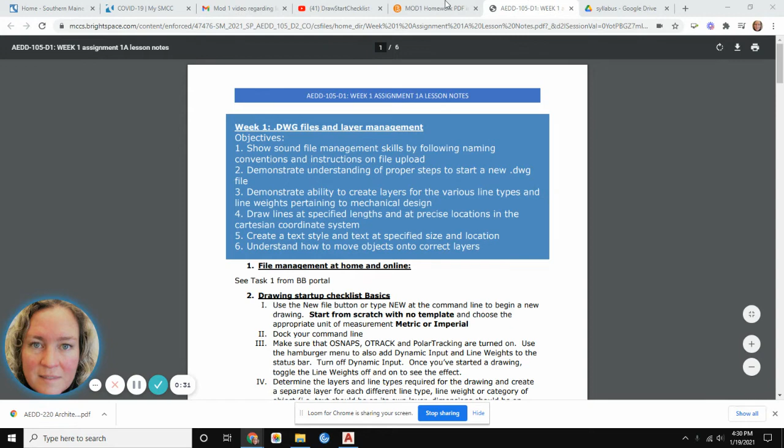This is the instructions and lesson notes for assignment 1, which covers the lines drawing, where you're going to be creating this drawing and creating these layers. So what I failed to upload was the video on how to create those layers. But also included in these notes is a drawings checklist.

This is what I want to start with right here. When you're starting a new drawing at home, you want to ask yourself what kind of drawing it is, and then check for these things. It would be a really good idea to print this checklist out and have it available. As you continue through the semester, this checklist will kind of just become automatic for you, but for now you want it nearby so you can keep track of it.

The first thing we're going to take a look at from the drawing is whether or not it is a decimal inch drawing or a metric drawing. One giveaway is the size of the dimensions. 10 millimeters would be something not much bigger than the length of this line, maybe even smaller, maybe half the length. The fact that this line is much longer than that is an indication that it's 10 inches, which makes more sense.

So these dimensions being shown here are decimal inch values, meaning we're using imperial units. What you're going to do is write inside the brackets the metric units that convert from those imperial units. The conversion is 25.4 — there are exactly 25.4 millimeters in a single inch. So if I take 10 inches and multiply by 25.4, the answer inside the brackets would be 254 millimeters.

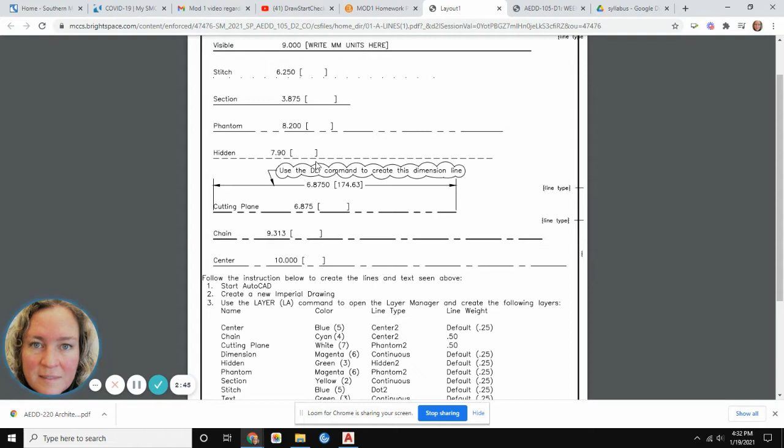All you have to do is take the number that's been given here — that's the number you use to draw the length of the line — and multiply it by 25.4. Put your answer to 2 decimal places inside these brackets, just as shown here. That's the first step we need to understand, and there's your conversion right there in your worksheet as a reference.

So the first step is to ask yourself, is this an imperial or a metric drawing? Then we're going to start a drawing file knowing that information. If you were successful in loading AutoCAD on your home computer or using the virtual desktop, open AutoCAD by double-clicking on the symbol on your desktop. On mine it's over here, but on yours, if it's the virtual desktop, it'll be somewhere over here. Just double-click on that, and it will open up the CAD program.

This is what CAD looks like when no drawings are open. To start a new drawing, click on the arrow here, and go to No Template, Imperial or Metric. We just figured out that this drawing should be drawn in imperial units, so we're going to choose the imperial choice here, and that's going to start a brand new drawing file.

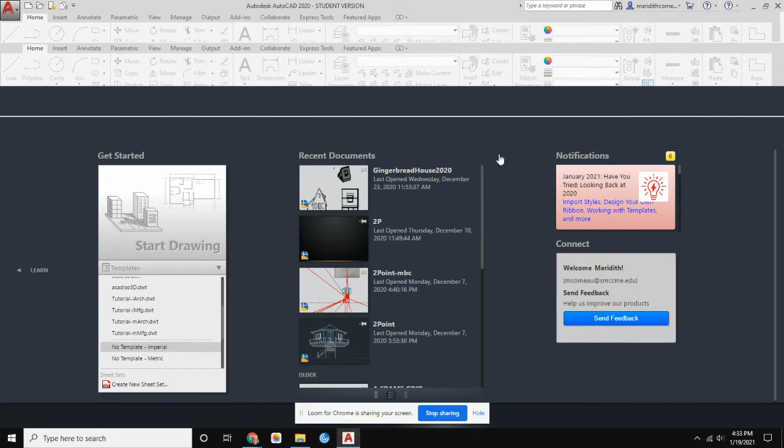It's just taking a second to do that. The next step in our checklist is to dock your command line. To understand what that means, let me show you around AutoCAD a little bit. When you're looking at AutoCAD as it's opening, the major areas to pay attention to are your command line, up here where my cursor is, and your place to type a new command. You always want to make sure that when you're ready to begin typing a command, or following along with me on a video, this says 'command:' and you're ready to start a new command.

As you start typing a command, like line, which I'll use as an example because I want to create a new line, a list of common aliases for the different types of commands will come up, and you'll see the command you're looking for appear in the list. Notice that all I had to do was type L and line came up as the first option. Start paying attention to how little of the command you actually have to type for it to come up.

So take a guess, what do you think the command is for circle? If I type C, the first thing that comes up is circle, so I can just click that and go right into the circle command. You'll be learning more commands and learning to pay attention and read that command line.

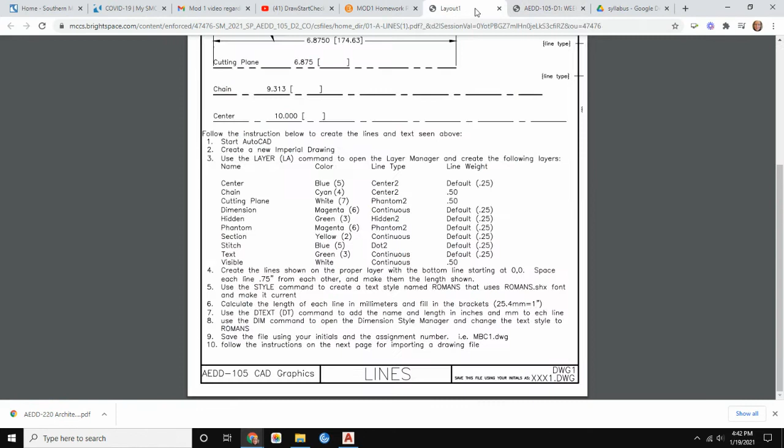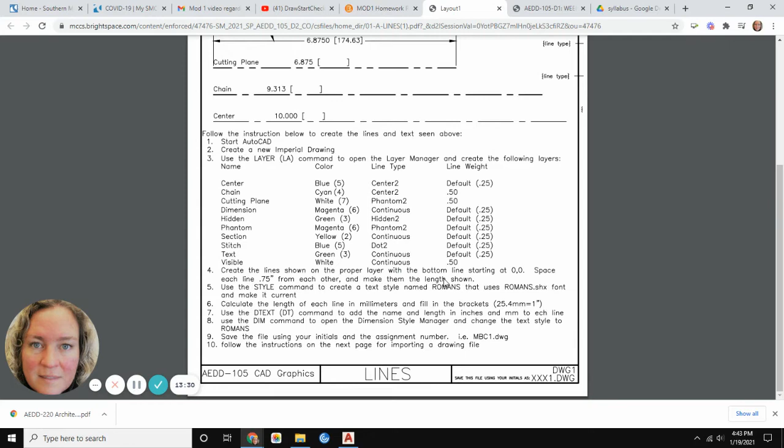Now I'm going to start with a layer called Visible, which is one of the layers you have to create for this next assignment. We'll go reference what it says for the visible layer: it should be the color white, which is color number 7—referenced up here—it should be a continuous line type, and it should be set to a line weight of 0.5.

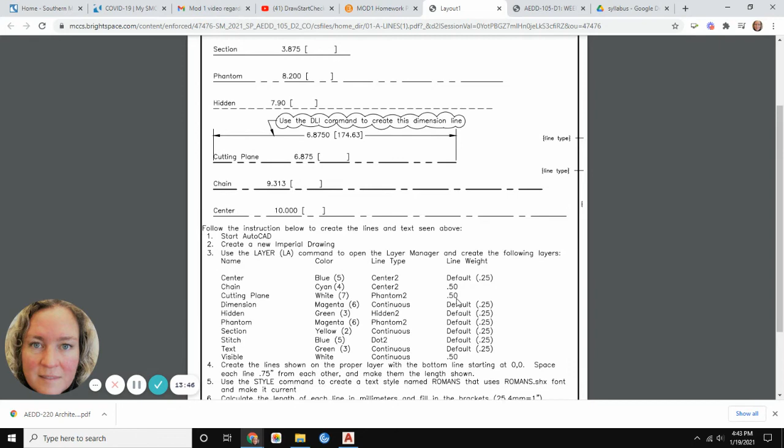Notice up here, these lines have different line weights—you have thick ones and thin ones. We'll be using the default line weight for thin lines of 0.25, and the 0.5 line weight for our thick lines. All you need to do is reference this to see whether a line should be thick or thin, and it also lets you know in the layers whether a layer should be thick or thin.

So let's go back to AutoCAD and set those settings. The color has already been set—the reason is the default color used for layer 0 is also white, so we already have white. If I wanted to change the color, I'd simply click on the color swatch, and a select color dialog box comes up where we can pick a new color.

For the line type, that's set to continuous already, since that's the default line type loaded in the 0 layer in AutoCAD. So how do I change the line type if I want to? You can click on continuous, and then load new line types. There's a load button with an ellipsis that allows you to load new line types into your project.

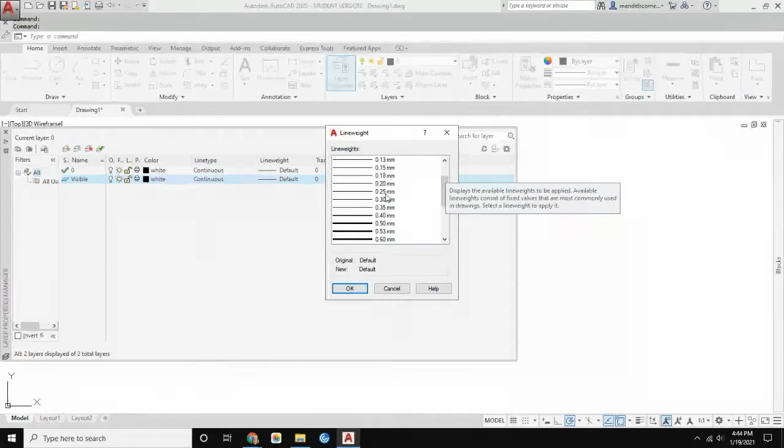The last thing is to set the line weight, and notice it says default. If we click on that, the default line weight should be 0.25 millimeters. We want to change that to 0.5 millimeters for visible lines, and you can see it actually changes the line weight in visual representation on your screen as well.

Just to show you the difference, I'm going to make the visible layer current by double clicking on it. You see how that puts the green checkbox next to it. I'm just going to do a line, so we'll also learn how to do the line command, L for line. As soon as I see the word line come up, I'll hit enter on my keyboard, and then read my command line.

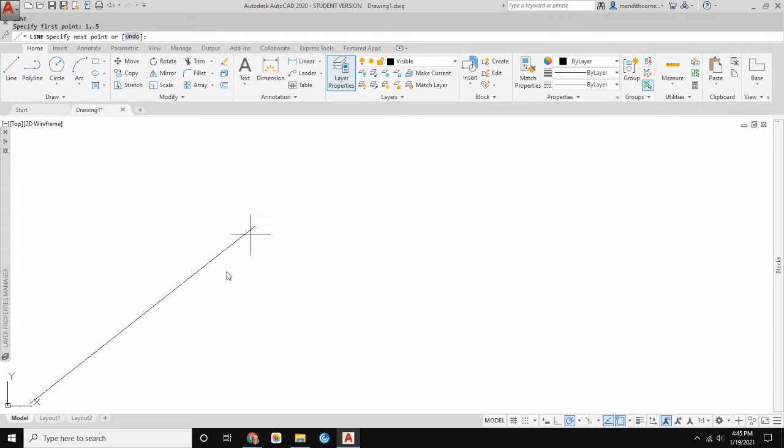It says line, specify first point. I can do a number of things to specify my first point. I could type in a value, which is called an absolute coordinate. Let's say I wanted to start the line 1 unit over in the X direction and 0.5 units up in the Y direction. It's going to start the line exactly 1 inch over from the 0 point where the X and Y axes intersect, and a half inch up in the Y direction, and I have my line started.

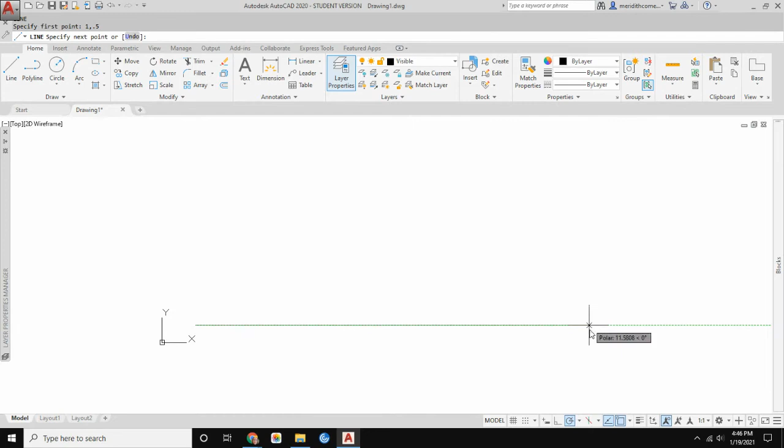It's going to look like an elastic. Notice every once in a while my line turns kind of dashed green and snaps to a nice straight edge. This is polar tracking coming into play—OTracking and OSnaps I'll demonstrate in a second. Polar tracking allows me to see that I'm drawing at exactly the 0 degree angle. If I turn and go up, it snaps exactly at 90 degrees, and it will snap again at exactly 180 and 270.

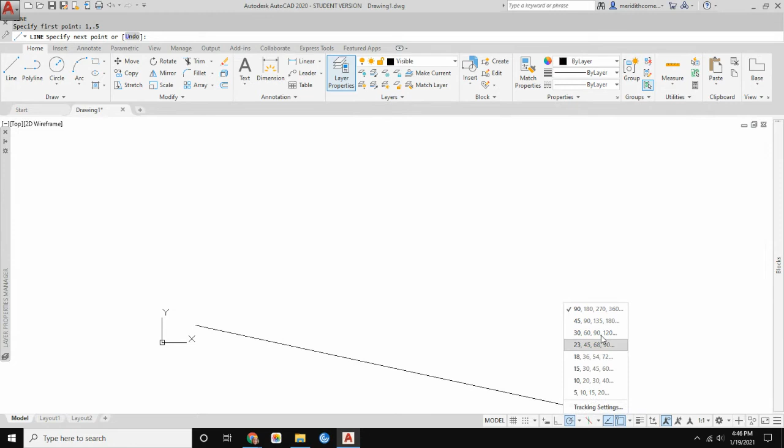If it so happens I've got a drawing with 30 degree angles, I could change to that, and now it'll snap at 30 degree angle increments as well—there's 30, there's 60, 90. That's how polar tracking works. I'll keep that on 90 for now, and then just draw in that line at a random length by picking a new point. If I don't want to use the line command anymore, I hit escape.

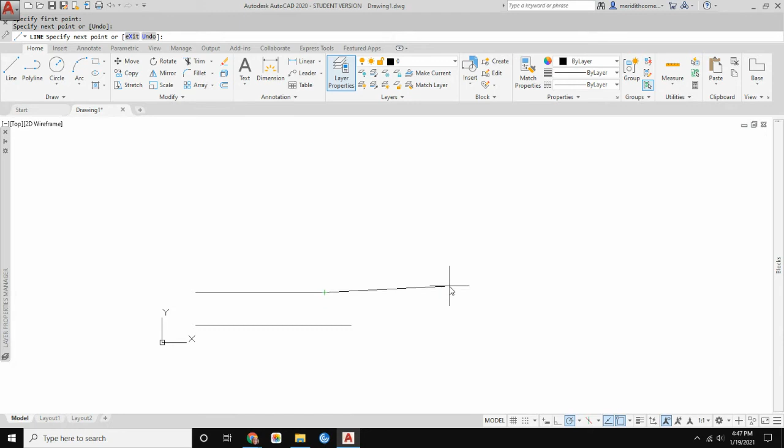Now let's draw a line using the 0 layer. It's also going to be black, and I'll just hit L and enter again and randomly draw the line this time—pick a spot with the left button of my mouse, and then draw the line the same length. Now these lines look like they're the same weight, so why did we change the layer?

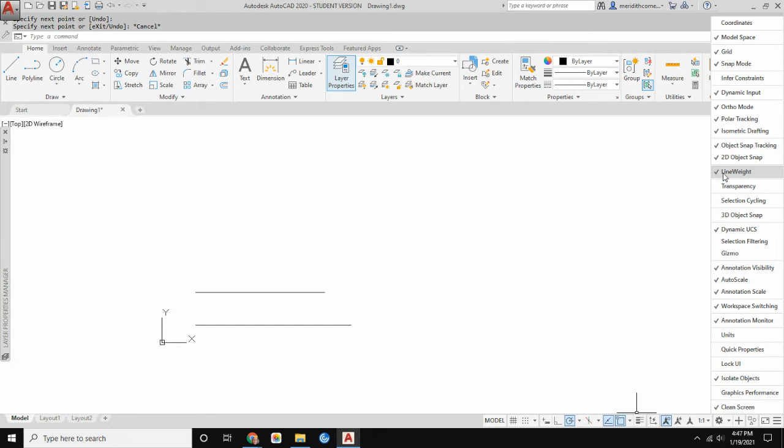One thing you want to make sure is turned on is your line weight display. If you don't see that line weight display in your drawing properties or drawing status, use your hamburger button and look for line weight. If there's no checkbox next to line weight, put one there and that button will appear. Now watch what happens when I click on that line weight button—now we're able to see the differences in line weight, because they're being controlled by the line weights set by layer.

So let's create another layer. This time we're going to create a layer, and I'll use Alt-N to create a new layer, and we'll make this one a hidden layer. I'm just moving around through the example lines you're going to be creating anyway—this one's to show you how to set up one that needs a different color.

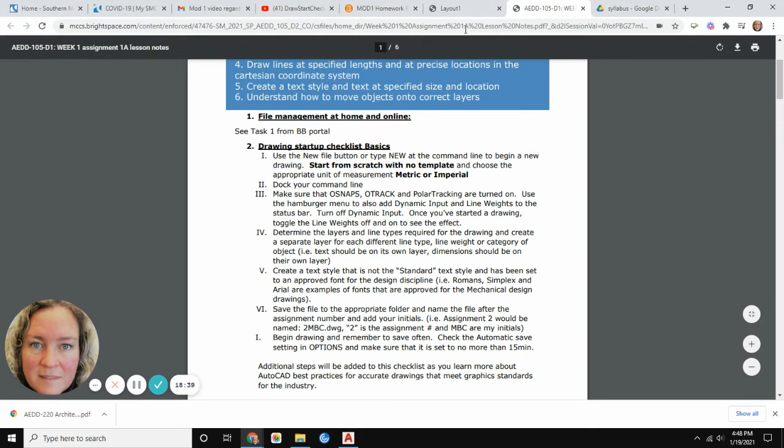Let's see what color hidden is supposed to be—it's supposed to be green, which is color number 3. It's supposed to be a hidden 2 line type, but it's supposed to have a default line weight. So we'll go back to AutoCAD and make those changes. It's color number 3, that's green. Go back into that layer—so we've successfully set that to green.

It's not supposed to be a continuous line; it's supposed to be a line called hidden 2. So let's see if we can find that in the list by loading that line type.

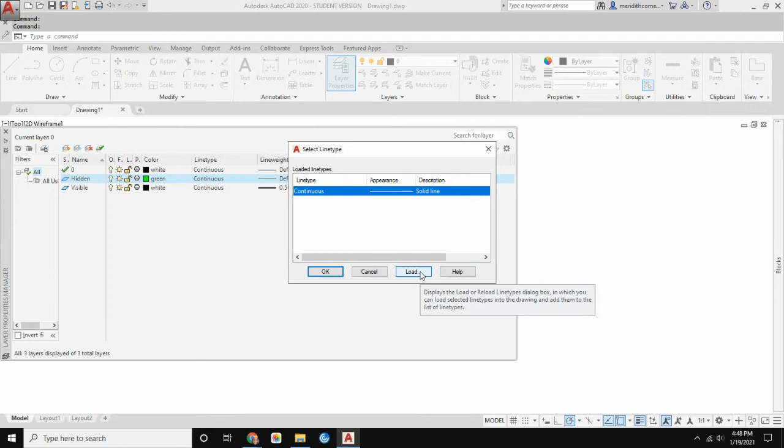If I scroll down, I can see we've got hidden, hidden 2, and hidden X2. According to the directions, it said hidden 2, so I want to select that one. That brings in that line type. I want to select that line type, which will then associate it with that layer. The last setting we need to change is the line weight, but it's already set to default.

So we're all set. Now, what if you had your cursor on the visible layer when you hit new layer? It may have set your line weight to 0.5 millimeters. If that's the case, you just click on that line weight again and change it back to the default, and then it will make it 0.25 millimeters.

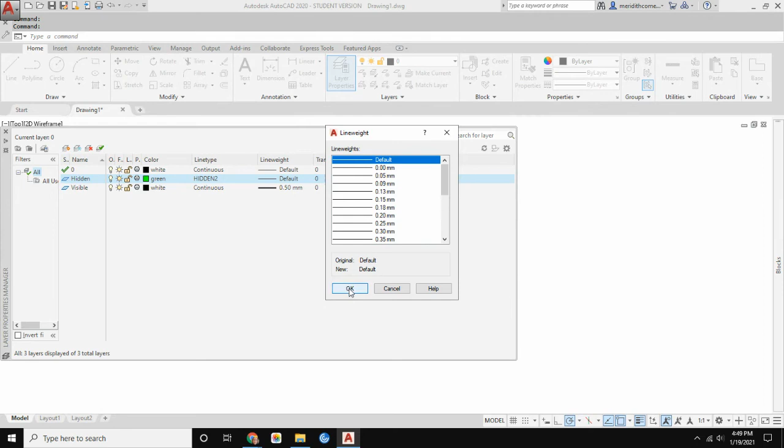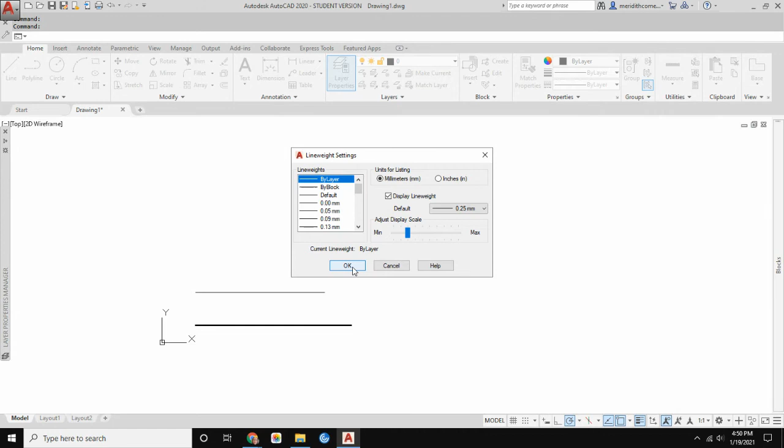Now, how do we know that the default is 0.25 millimeters? Let's see if we can find that out. I'm going to put my cursor down here and right click on that line weight setting, which will allow me to go into the line weight settings button. In line weight settings, you can see that units for listing is in millimeters, and the default has been set to 0.25 millimeters. So that's how I know it's 0.25 millimeters. I could change those settings if I wanted to, but that's the default settings that AutoCAD came with, so I want to keep it the same that you guys would have set up on your end when you downloaded the software, started using it right out of the box.

So now let's switch to the hidden layer. This is another way we can switch layers. I showed you how we could double click on the layer to make it green, with the green checkbox showing up next to it. But if you're on the Home tab, you can see that we have a little section devoted to layer control. If I click on the arrow next to the layer that's showing and pick a different layer, that makes that layer the current layer instead of the one we had before. This allows me to switch to different layers so I can switch to the layer I want and draw or make a new line.

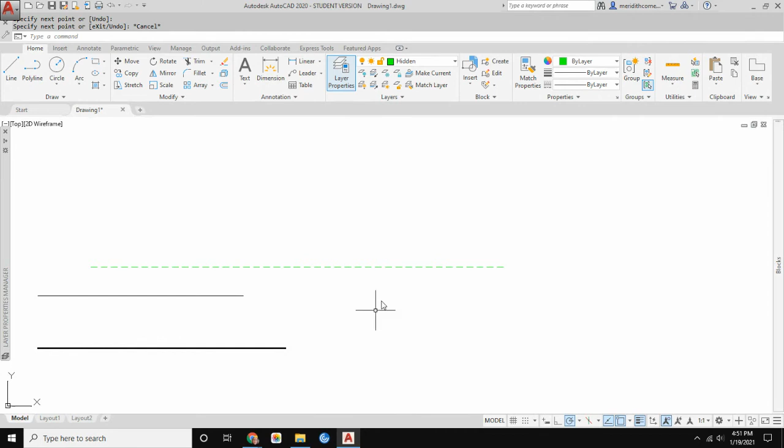Let's see what happens if I make another line. L, enter. Specify first point. Let's just pick a random point and draw the line. We end up with a line that's green and has the hidden two line pattern, so it looks like it's working properly. We are setting our layers up, and our layers are controlling our line types, which is exactly how you want to set it up. All right, let's do that one more time with the center line.

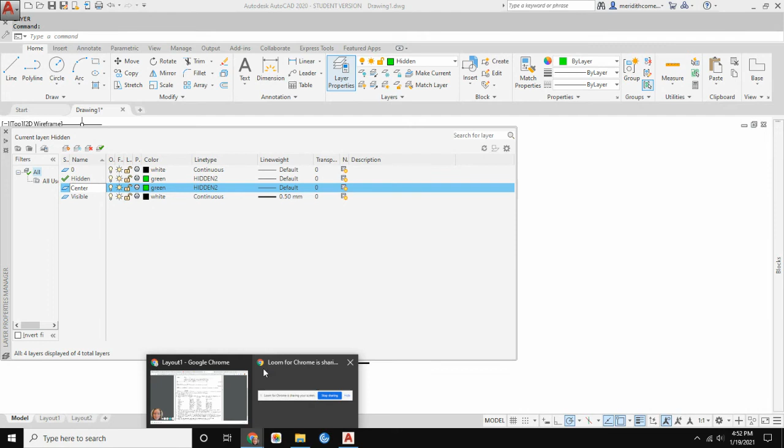I'm going to type in LA and hit enter and create a new layer and call this one center. This time it copied or duplicated the settings for the hidden layer because that was the layer that was selected or current when I hit the new layer button. So I need to change the color to the correct color. Center lines are supposed to be blue, or color number 5, and have the center 2 line type. Let's change this to blue.

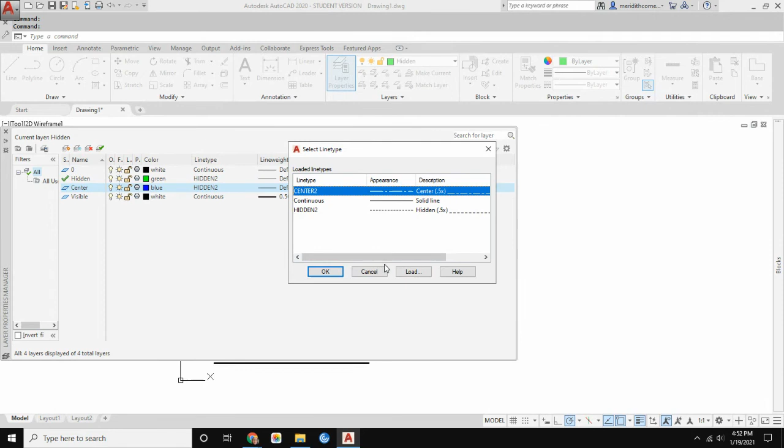Change this to the center 2 line type, and switch the line type here. So that loaded the line type. Remember, when we click on load, we look for the line type we want to load, and then we actually have to select it to make it be assigned to the layer we are currently highlighted on. And then the line weight, I believe, was the default line weight. Let's just double check that. Default, okay? So we now have another layer called center, and it has a different line type.

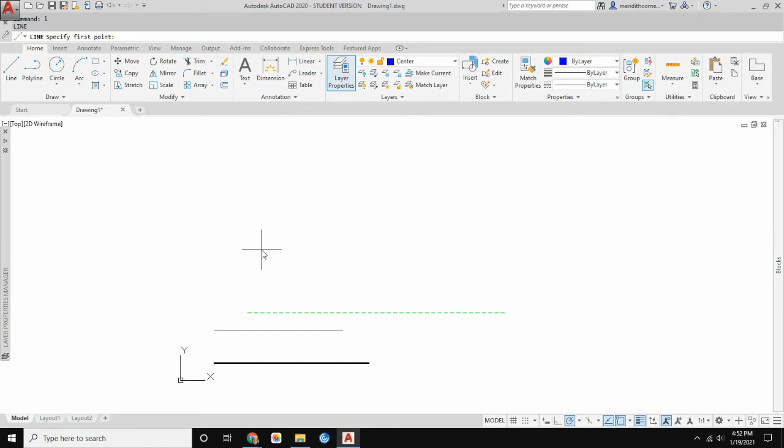If I just draw the line, Command L, enter, and let's draw a line this way this time. There's our center pattern, and it's working, okay? So this gives you an idea of how to control layers. You can see how it's going to control our line types and our line weights.

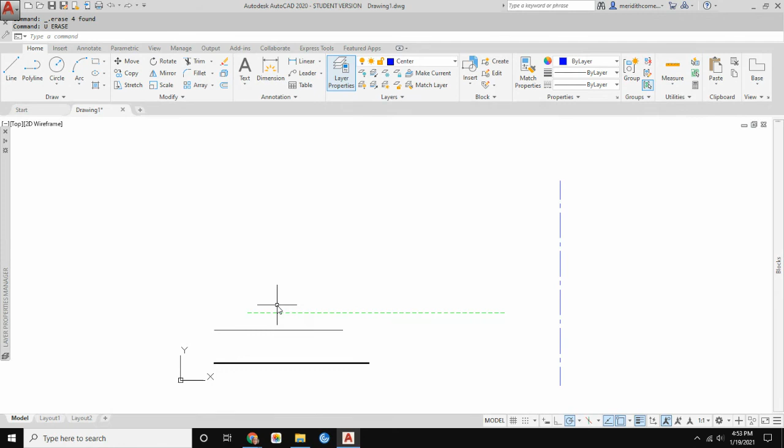What you're going to want to do is create a layer for each one. Let me back up there. I just realized I did something without explaining it. I just erased a bunch of stuff. So once you've practiced making a layer and testing to see if your line actually comes out like the layer says, you're ready to make the rest of the layers yourself, set their appropriate colors, line weights, and line types according to the instructions.

When you're done testing those lines, take your cursor and drag from right to left. This is important to see: it creates a window with a dashed outline. What the dashed outline means in AutoCAD is that anything this window touches, even if it's not completely inside the window, will be selected.

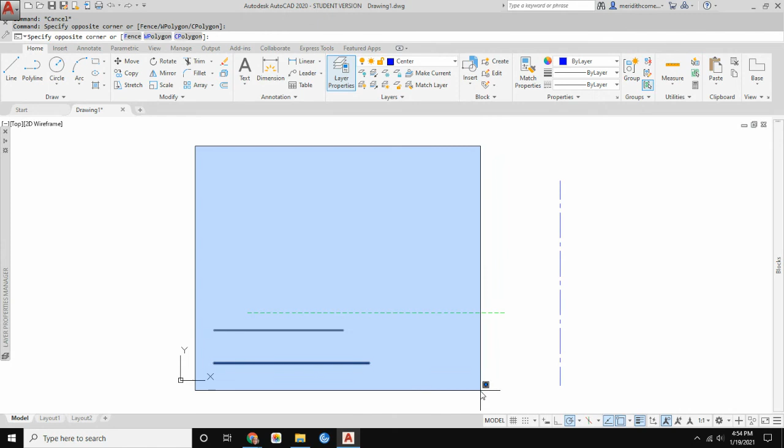Notice I have no command invoked while I do this. If I draw a line in the opposite direction, notice the window is a solid blue edge, and only the things completely contained inside the window get selected. So I'd have to put a window around everything here to select it all.

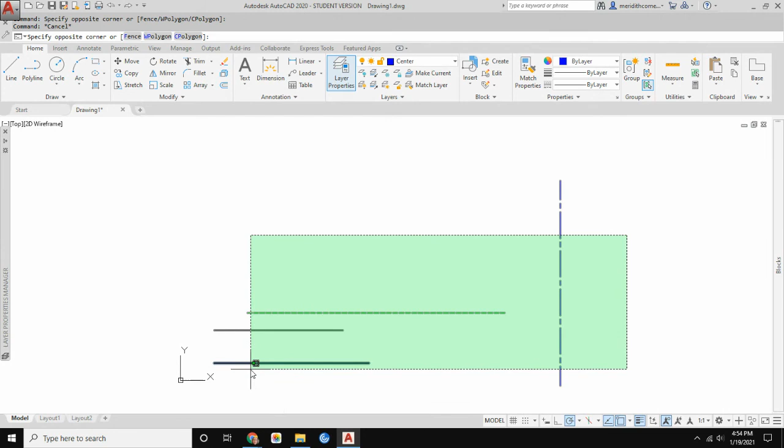So what I did, which you saw me do before I started explaining it, was just a sloppy window. I made sure I touched this green window, and going from right to left, I touched everything and selected things very quickly. So when you're not too concerned about avoiding things, you can just do a window like that.

The way I'm finishing that rectangle is—some of you will accidentally start a rectangle without realizing it, just by clicking on the screen without a command invoked. If that happens, just hit escape if you didn't mean to do it.

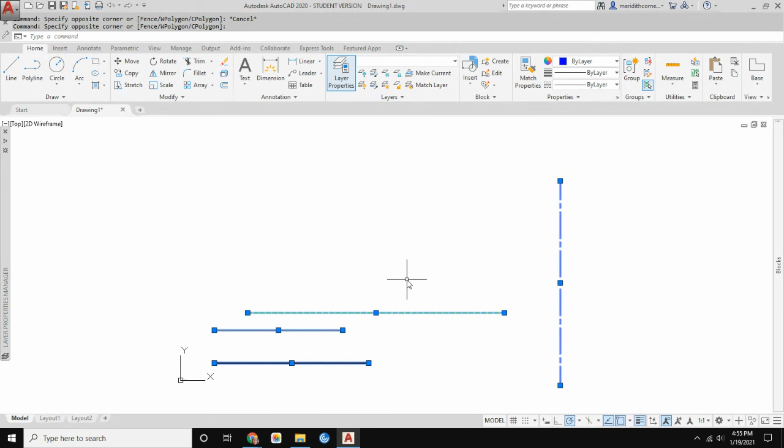But if you're using it like I am, it's a great way to select multiple items quickly. Items are selected when you see these blue squares on them—those are called grips. With those items selected, I can hit the delete button on my keyboard, and it will delete those items. So that's one way to get rid of things.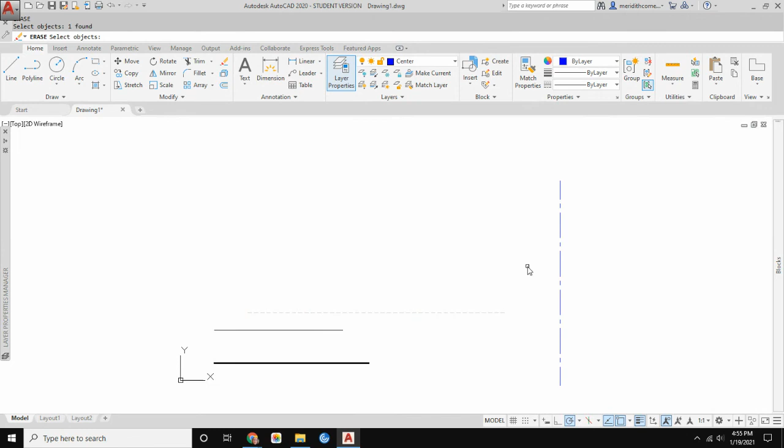Another way to get rid of things is to type E at the command line. You can see E results in the command erase. If I hit enter, the next instruction is to select the objects I want to erase. I could select one object at a time, or like I just showed you, put a window around every object, then hit enter and do the same thing.

So you now know how to create and erase objects. I think you're ready to begin the first stage, which is creating all the layers you need for the first assignment. Before you get started with the actual drawing part, feel free to play around with some things—you've got all these shapes you could try playing with.

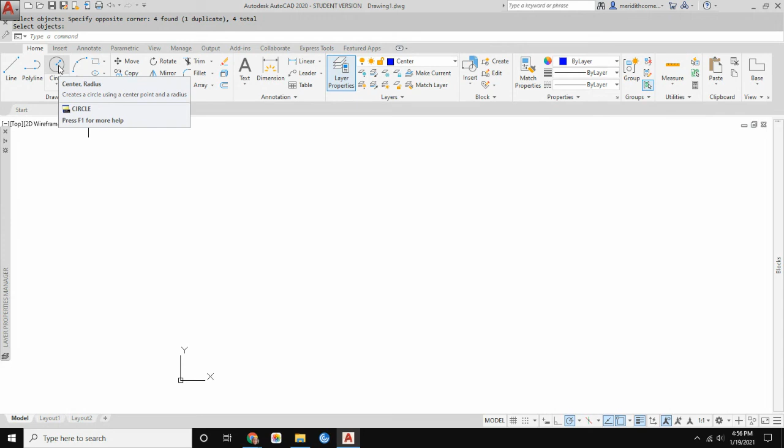What happens when you click on circle? What does the command line tell you to do? Follow it: specify center point of circle. Okay, and now what do you intuitively think you're supposed to do? Create a radius—sure enough, that is. See how the circle starts at the center and defines the radius.

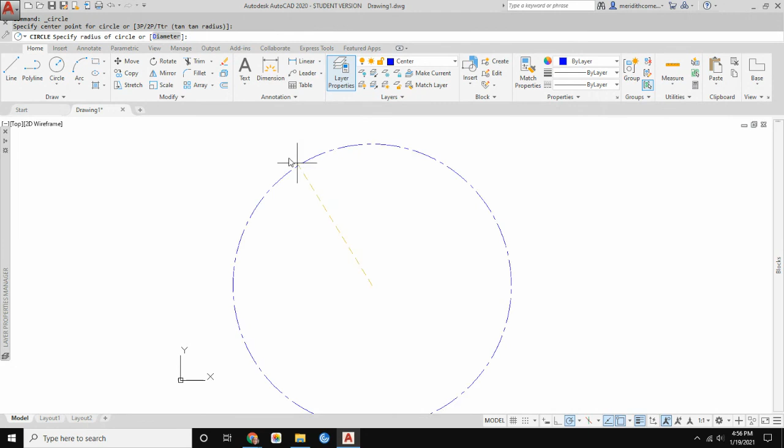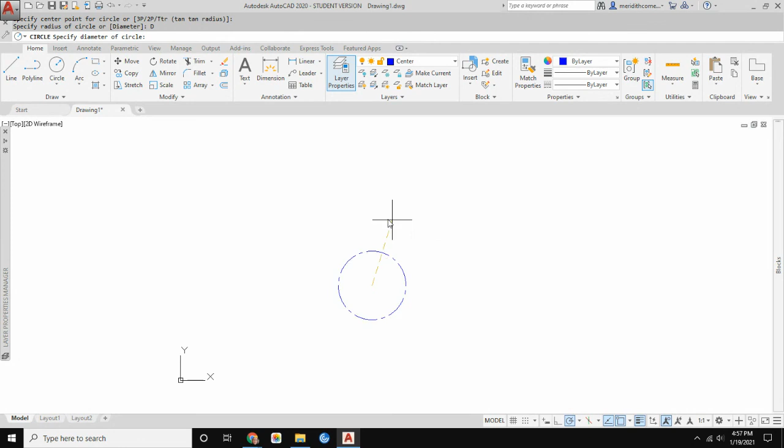What if you wanted to define a diameter instead? Let's see what happens if we click on diameter. Now we can define the circle's diameter rather than the radius, which we can tell by noticing where my cursor is relative to the center. The diameter value, if you type one in, will give a size half of what you'd get typing in the same number as a radius value—so we get a smaller circle. Depending on what dimensions you're given, you might want to use one choice over the other.

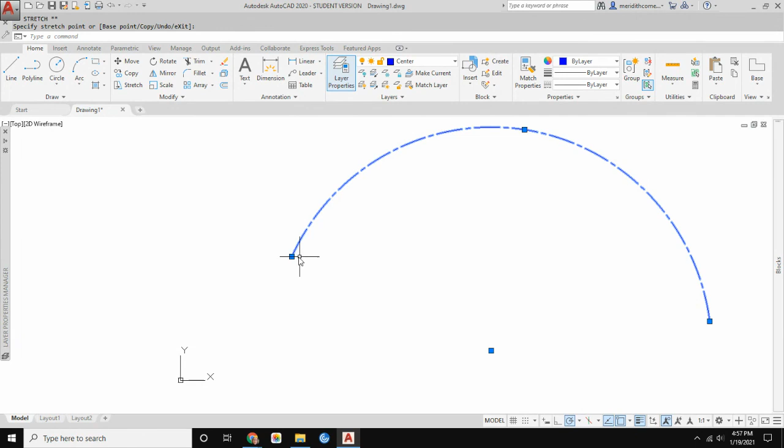A lot of these commands have different choices once you start building them. So the arc command—what does that do? Specify a start point, let's see what happens, specify a second point, specify an end point. You can see I can create all kinds of different radii arcs, big or small. And what happens when you click on that arc and grab one of these grips? That changes your radius. This also changes your radius, but notice the other two grips—the arc keeps passing through them.

Feel free to go in and play around with these things, because now you know how to erase them if you don't want them there anymore. Part of the way you'll learn in this class is by exploration—hitting buttons and trying things out. So after you've created your layers, have some fun and see what happens when you try using some of these tools.